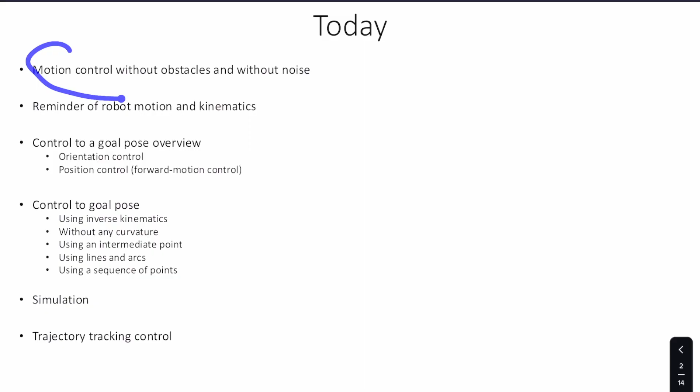So in this lecture we'll be talking about motion control, and we'll be looking at a simpler version of it. So no obstacles for now, and we're not going to worry about noisy sensors. We're going to always assume that we know exactly where the robot is at any given time.

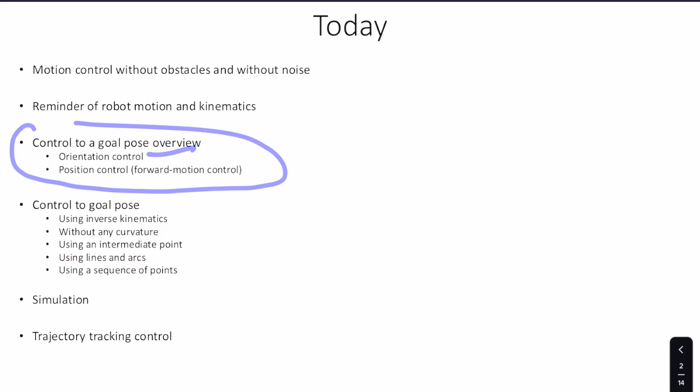I'll start by reminding you a little bit about robot motion and kinematics. And then we'll talk about a general high-level overview of what does it mean to have a goal pose or a goal position or orientation. Then we'll go through a couple of different versions of control to a goal pose.

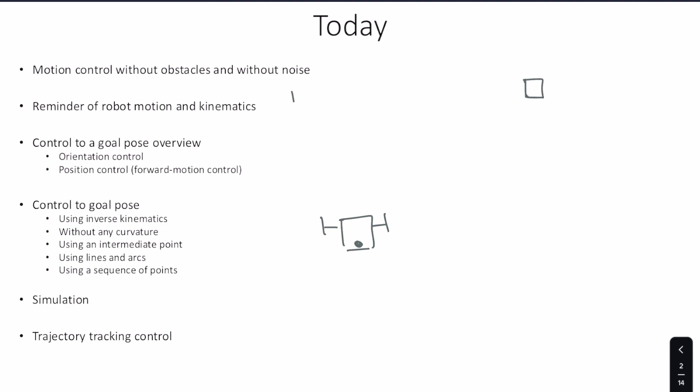So specifically, if our robot is here, and we want it to be at some goal position, well, we'll have to remember some of what we've had from previous lectures. So let's say we have a frame here. That is our global reference frame. We'll have our local reference frame attached to the robot itself. And we'll define our goal. Depending on which frame is most useful, we'll define our goal in one of those two frames.

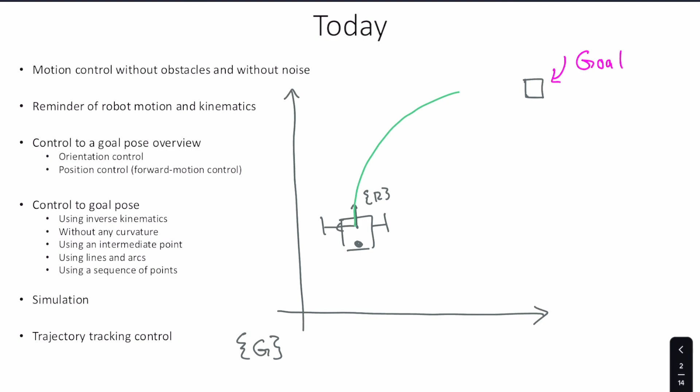And then, pun intended, our goal is then to have the robot travel to that goal position or pose. And I'll give you definitions for position and pose and orientation in the next slide. After we've looked at a couple of different ways to do that, we'll talk a little bit about simulation. And actually this tracking will go down under this bullet here. I actually reordered these last two and forgot to update this slide. And that will be your exercise. The first part of your exercise for this week will be simulating this motion here.

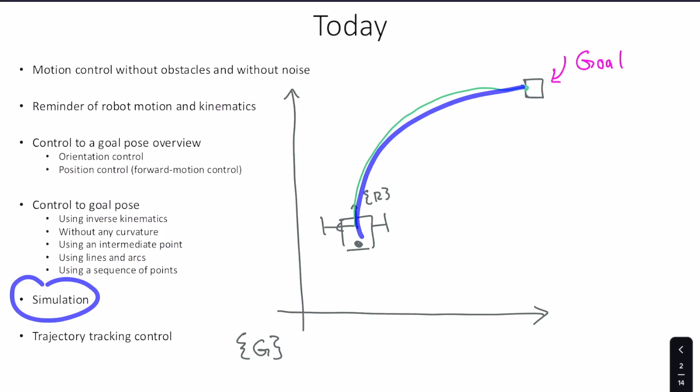So when I say motion control without obstacles or noise, let me paint that picture that I had from the previous slide. We'll have our global X and our globally defined Y and a globally defined origin at 0, 0. Our robot is going to have three parts of its state vector, and those are going to be the pose of our robot.

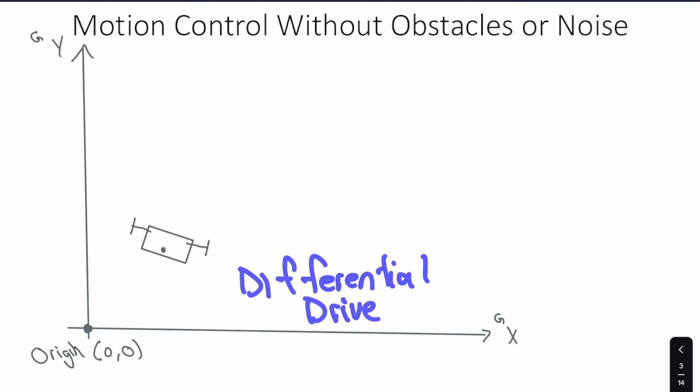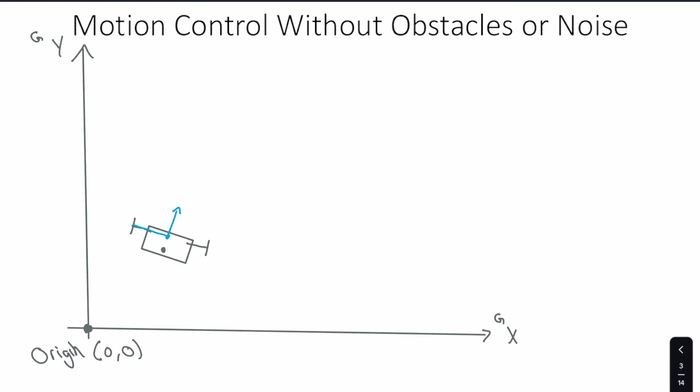This little ball back here, as a reminder, is the ball caster. So something that just glides around the ground. And then we have our two wheels. This is our differential drive robot, which is pretty much the simplest version of a robot that you could try to control. And it has its local coordinate frame, with X and Y defined for the local frame.

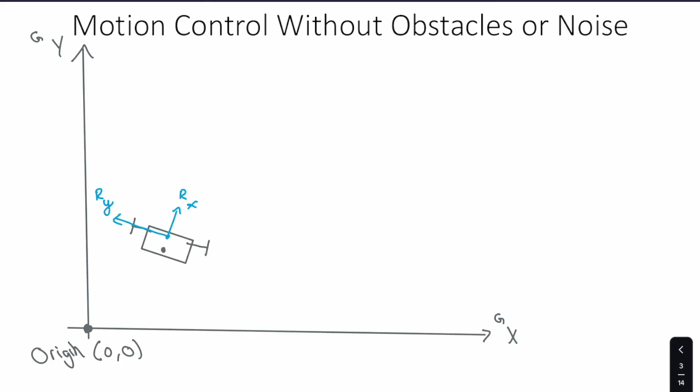This point here is the position of the robot. And our robot really just crawls around in that two-dimensional plane on the floor. So it's going to have an X, Y position. And we could define that with respect to the robot's reference frame, but that's really boring. Those two values are just 0. So we will define that with respect to the global frame. It'll have its X position here, and its Y position here.

Unless otherwise stated, we'll almost always have the robot start at the origin, and then as it moves around, we'll know its position with respect to some fixed position in the room. So we could pick one of the square tiles on the floor in 105 and say this is the origin, and if you're 5 centimeters forward from that, we know exactly where that is. So that's the position, but we'll also have an orientation.

If I do a better job of having a horizontal line parallel with the global axis, our orientation theta is going to be measured with respect to the global x-axis, and it's going to be defined as the angle between the global x-axis and our local x-axis. So those two axes. That's how we're going to define theta.

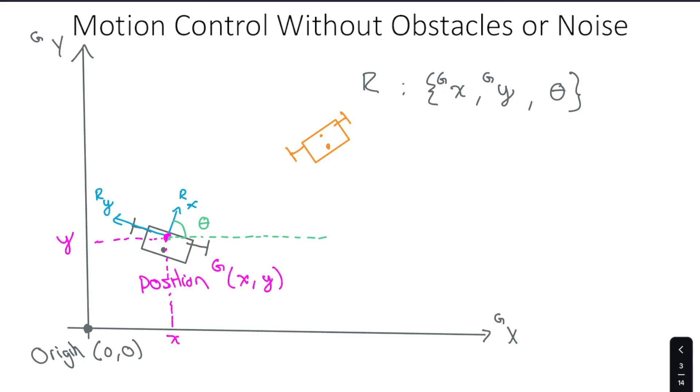On the other hand, I could have a target location. And I'll draw that as another robot. And the reason I'll draw that as a second robot is because I want us to remember that the target location, or goal, I'll try to stick to the word goal, is the exact position and orientation that we want our original robot to be in. So both of those have to be true, both the position and the orientation.

And I'm not going to group that together into a frame because it really doesn't make sense to call it its own frame. Instead, I'll just reference that as an X position in the global coordinate frame for the goal, a Y position in the global coordinate frame for the goal, and an orientation for the goal. So these three values here are our goal pose.

So the notation gets a little bit messy here, but try to remember that the superscript capital G is for the frame. And the lowercase g here is a value for x. Just happens to be defined in the global coordinate frame. So any value for x, any value for y, and any value for theta. So sort of anything in this space. Or I guess we could have negative values as well.

So the goal for motion control is to drive the two x values to be the same, drive the two y values to be the same, and drive the two values for theta to be the same. We're not going to do those three things separately, and in fact the control algorithms that we'll look at will affect all three of those values at the same time.

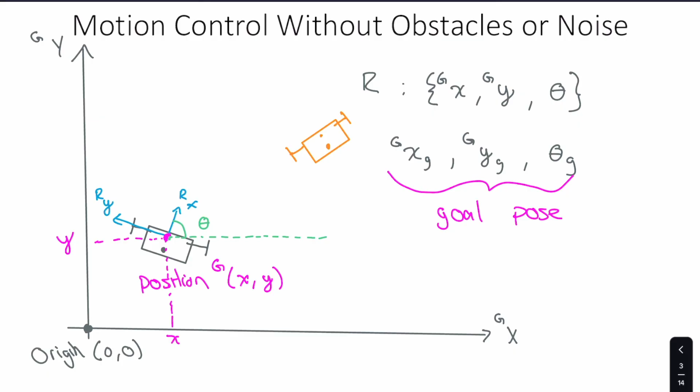Alright, well that's a good place for this first video to stop. In the next one, I'll give you a reminder of our kinematics model that we've developed for our robot.